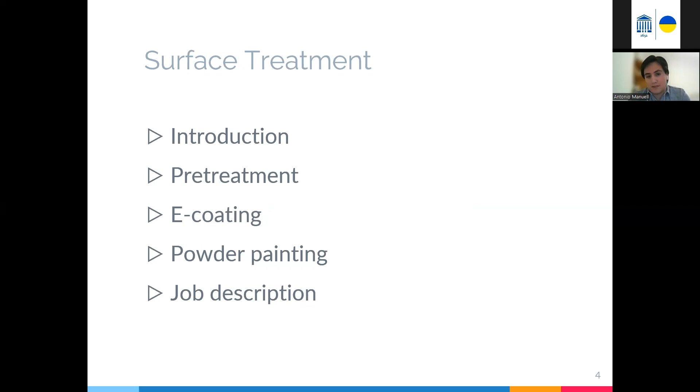So to start with, as I mentioned, surface treatment is when we're preparing a surface, in this case metal of any type. In our company we deal mainly with hot rolled and cold rolled steel, but it can be zinc, copper, or whatever metallic surface. There will be different technologies suitable for different metals, from the most tiny nut or bolt up to a fancy car, or all the signs that we see on the streets or highways.

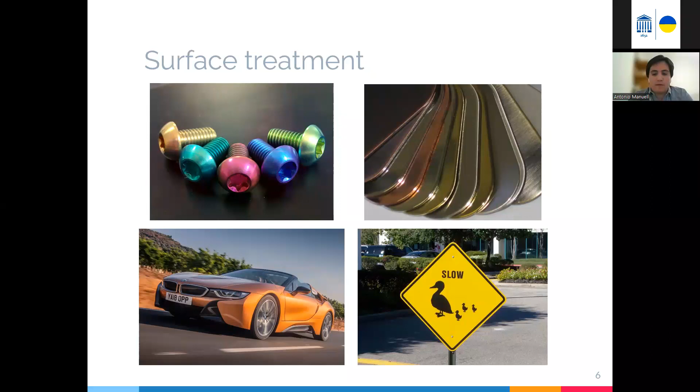Pretty much every single metal you can find around your house or around you has gone through some sort of surface treatment. There are so many different technologies applied for this—electroplating, anodizing, phosphating, etching. There's almost an endless list of different systems, or different technologies, that you can apply in combination depending on your target and the quality you're achieving. It's just like choosing the right tool for the right job.

It's not that we want to overdo the quality for something that doesn't really require that much protection, and at the same time we don't want to get into the short end, just making a little bit of surface treatment where something actually requires a lot more protection.

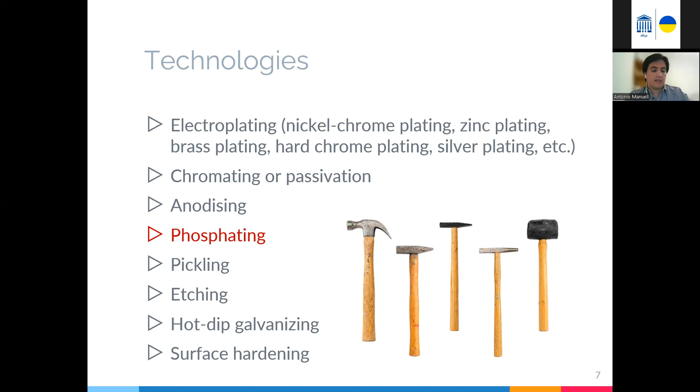We're going to be focusing a little bit more on phosphating, which is the surface treatment that I take care of—the technology I'm most familiar with. All of this is basically to stop corrosion. Actually, we cannot stop corrosion; the only thing we can do is delay it as much as possible. That's why we utilize different types of processes, depending on how long we can or want to delay this corrosion.

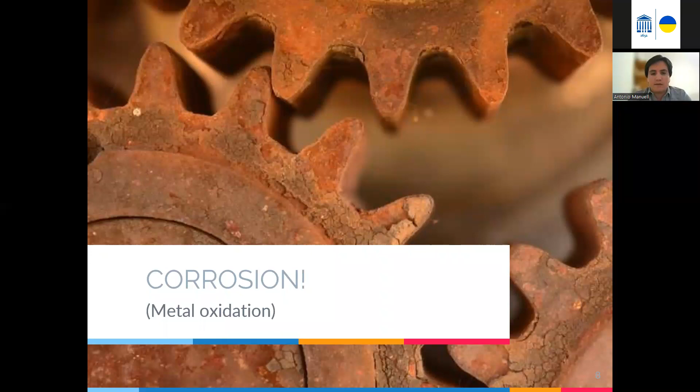As I said, it's impossible to stop corrosion, but what we want is to delay it. So the applications will be for all metal surfaces that we're going to surface treat—we just want them to last as long as possible, and for achieving that, we need to delay the corrosion.

This actually also has another aesthetic application, depending on the top coat or the technology and requirements you need, and it's mainly for outdoor exposure. Since I work in the automotive industry, cars go all over the world, in all types of environments with a lot of humidity, heat, cold, snow, and salt on the streets. So the surface treatment composition or system we choose must be able to protect against all of that range of temperatures and environments.

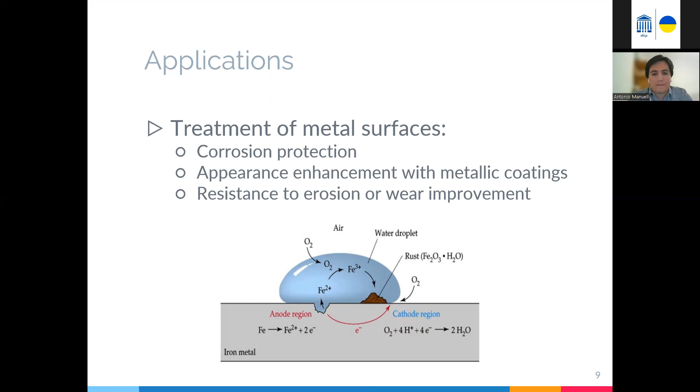Our process flow basically starts with a pretreatment, where the main core or the most functional part will be the phosphating. We will get into that one. Then we will have the electrocoating, which is just a cathodic process. And then the powder painting.

This is what I meant by you need to choose the right system of surface treatment for the right job. For something that doesn't require that much quality or protection, you might get away with only choosing the first two, pre-treatment and e-coating, and skip the powder coating. Or if you don't need that tough of a protection but still need a top coat, you maybe skip the e-coating and do pre-treatment and powder painting, depending on the product, or depending on the environment where that product is going to be utilized.

If it's going to be indoors, let's say, for example, hospital beds. Hospital beds are not really outside at minus 20 degrees with snow, but they also require some protection because hospitals are very often sanitized, so there's moisture involved also, so they need some protection. Just to give another example.

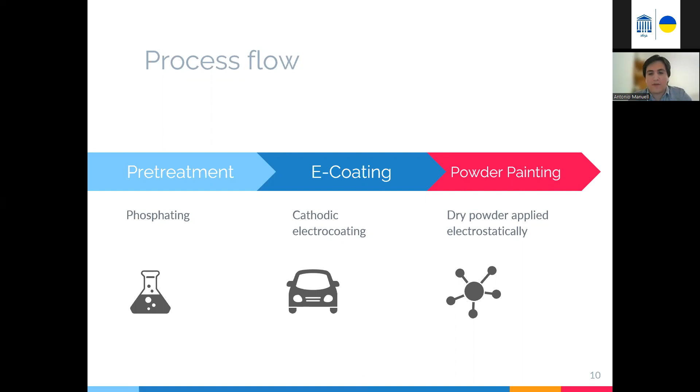So to start with the pretreatment, it's going to be composed of different stages. We're going to have first our degreasing stages, which in our case are two different stages that together make the cleaning stations. Some rinses, then what is called a conditioner, then the zinc phosphating bath, more rinses, then what's called the seal rinse or passivation stage, and then a demineralized water rinse.

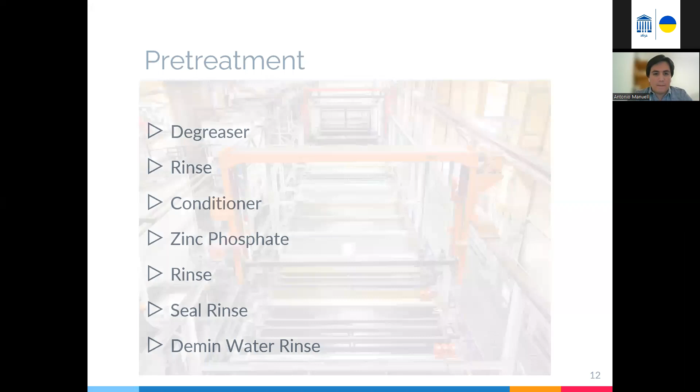This is how it looks. There's different ways of laying out this process, but in our case it's basically 15 different tanks with transporters that just move the articles or the products from one stage to the next, and each stage has its own different parameters and purposes, all combining to make this surface treatment system that we're looking for.

Starting then, first things first, with the degreaser. We received the metallic components. Actually, the metallic components are also manufactured here in Estonia, just in a plant in Pärnu for the most part.

The degreaser's purpose, what it's going to do, is just to remove any oil, grease, dust or particles that are on our products that we want to protect. It can be just from being outside in the environment, or because of the manufacturing process, where very heavy oil greases are used as lubricants for deep forming processes, or it can be from welding. There's a whole lot of different impurities that we consider impurities for our process that can mess up our surface treatment.

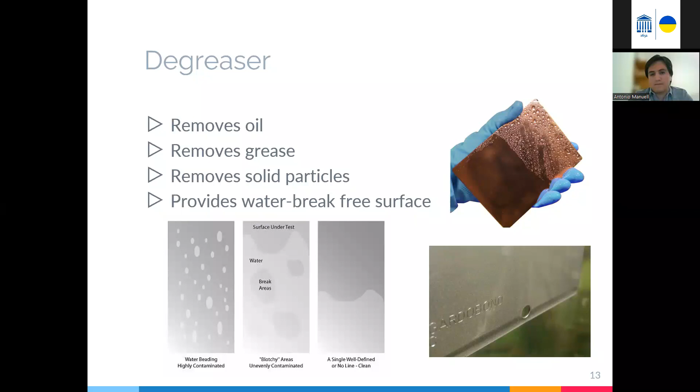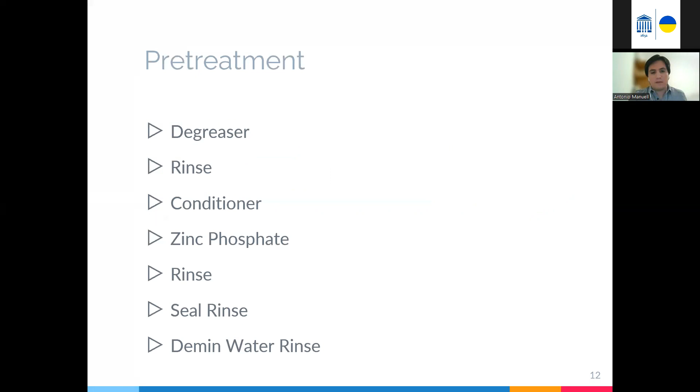Then we got three rinses. These are mainly just to remove the excess of the degreaser solution, because we don't want any of the solutions or different components of each bath to travel down the road to other baths. Some of them actually make some very nasty reactions that will maybe block your filtration pumps or your circulation pumps or your filters, which is something you really want to avoid.

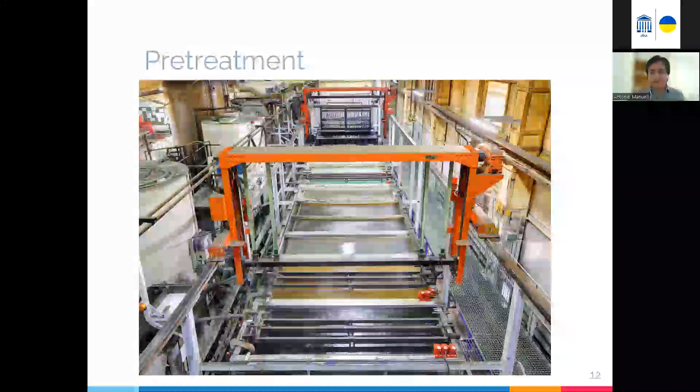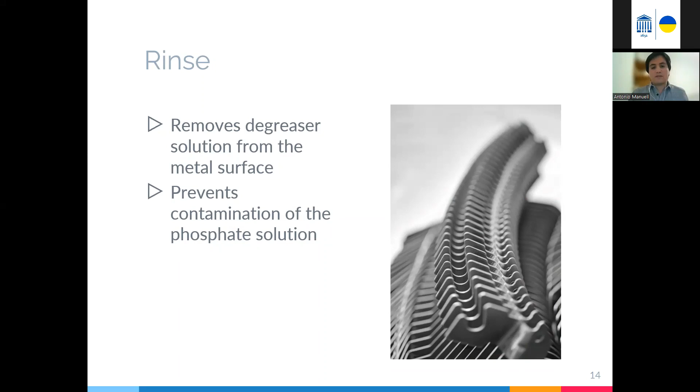So that's the whole point of the rinses, to create these buffer zones that remove anything that doesn't belong down the road in the process line. It also removes the chemicals or solution left over on the parts, because not all parts are very simple. Some of them have a lot of different shapes or tubes or places where that solution can actually collect, and then you have what we call drag out of the solution. So we want to minimize that as much as possible, push it back to the stages where it belongs. In this particular rinse, what we don't want is to contaminate the phosphate solution that comes two stages later.

Then we have the conditioner, or what we call the activation. This one works very closely together with the zinc phosphate stage, because what it's going to do is activate the surface.

How it will activate is basically because once we have our clean metal surface, after the degreasing stages and the rinses, it's going to deposit some salts where the zinc phosphate crystals can start growing. That gives us a very uniform, very smooth crystal structure. If we would skip this and go straight into the phosphate stage, the reaction will still happen. We still have the clean surface layer, but the zinc crystal layer won't grow as uniform, it'll be more accidental. Depending on the corrosion resistance you're looking for, that might already be a failure point or weak point for corrosion to start acting on your product.

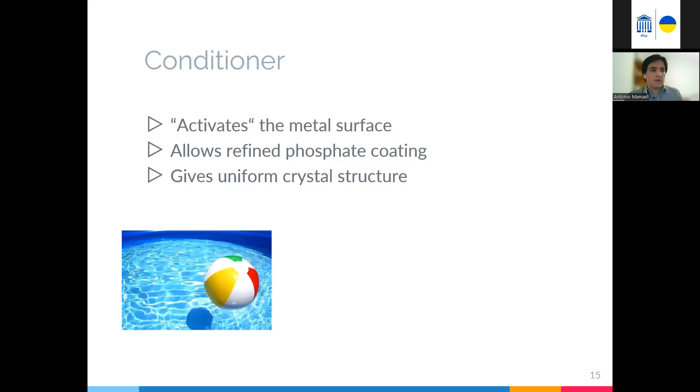So basically, if we imagine our clean metal surface is the surface of a pool, it's easier for us to cover it if we just put some balls on top, and those would be our zinc crystals. What covers the surface better, big balls or slightly smaller balls? If we have really big balls, or in this case crystals, the gaps between them at a microscopic level are still somewhere moisture can penetrate and attack our surface. The whole point is to isolate it to delay corrosion. So the smaller the crystals, the smaller the gaps between them, because they cover the surface better, as close as possible to 100% protection coverage so corrosion can't penetrate. If we go even smaller in crystal size, we get an almost foolproof layer where all the little gaps are covered as much as this technology allows.

So for achieving that, there are several parameters in these couple of stages, the conditioner activation and the phosphating bath, that will play a role in determining which type of crystals we're going to end up with.

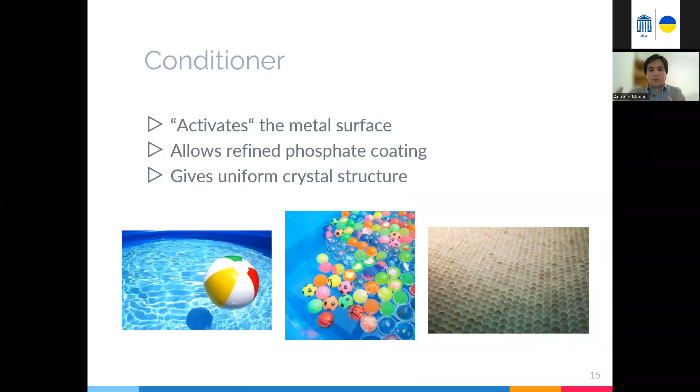So the zinc phosphate layer, as I hinted in the beginning, is the core stage for our corrosion protection. What it's going to do is just delay corrosion. This isn't really considered a painting coating, different from wet paints or later the e-coat, because we're just adding an extra layer that isolates our material, but it's not applied to the surface, it's actually chemically modifying the surface. So after this layer, what we'll have exposed on the surface is the zinc layer, no longer the iron or the steel.

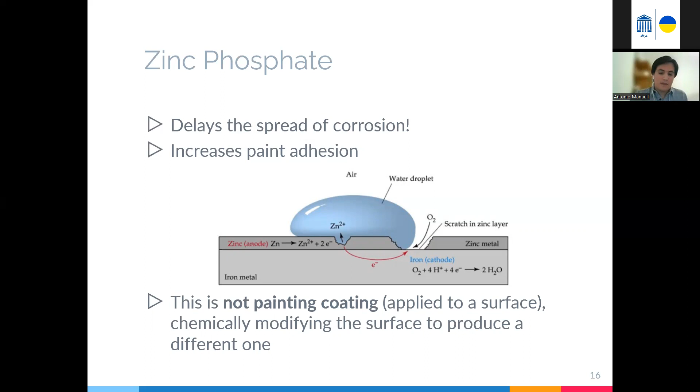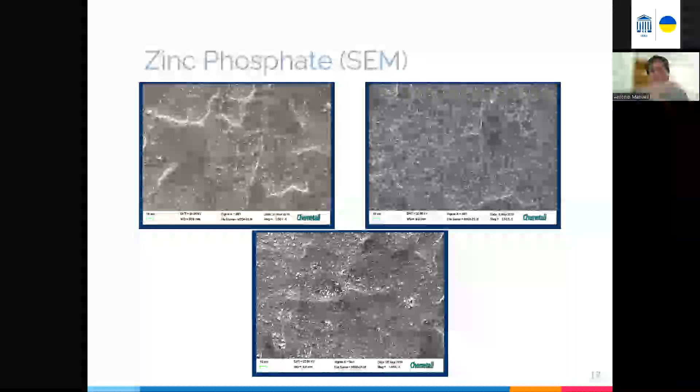After that, we have another rinse stage. This green one here is the phosphate stage. After, we have a couple of rinses, with a very similar function as the previous rinses. What we don't want is the phosphate solution to travel down the road into the e-coat bath or other stages down the road. We want to prevent that from contaminating other tanks.

Also, it removes the extra byproduct, because it's a chemical process. What happens inside of that bath is some byproduct, which is sludge, basically iron phosphate that is generated because of this zinc layer forming on the metal. We want to remove that sludge too, because otherwise it will interfere with the next layer on the system.

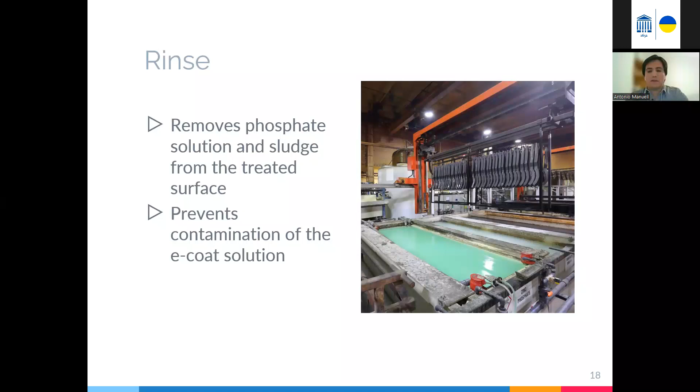Then we have a seal rinse or passivation, which is basically after we've already cleaned our surface and activated it, we put these initiation points where the crystals will start spreading around. Still, even if the crystals are perfectly, ideally, how we want them, on a microscopic level there's still some gaps between them.

So the seal rinse is going to stop the chemical reaction happening, because there's still going to be some droplets of our zinc phosphate solution inside. And you might guess, but if the zinc phosphate solution creates this layer, why not leave it there

I don't know, 5 or 10 minutes? The problem is, once our surface is covered and there's no more iron or steel for the zinc phosphate solution to work on, it's going to start reacting on its own on the same zinc phosphate layer. That won't really destroy it, but when you've achieved this nice uniform layer to protect against corrosion, you'll start having some unevenness, some valleys or hills that you don't want there.

So that's the point of the passivation or seal rinse: to stop this process from continuing by neutralizing and stopping that reaction that's still happening at a microscopic level, with the droplets trapped between the crystals.

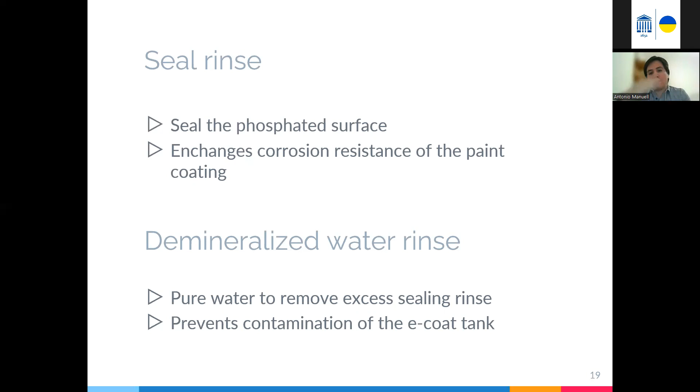After that, we have our last stage of the pre-treatment part. All of this, since the degreaser, is considered pre-treatment line. So the demineralized water rinse is just our last chance to remove any dust that could have been deposited on the part during transportation between stages, and it acts as a safety belt for our e-coat tank, which is the next stage.

So it's all good and dandy that I'm telling you about all these stages and how our process actually works, but the important part, where applied measurement sciences has a role, is that there are a lot of parameters that need to be controlled in every stage. Not all stages are controlled with the same parameters.

Zinc phosphate, for example, has much more parameters that need to be controlled and adjusted than, say, the rinsing stages. For the rinsing stages, you just want them not to have high concentration, and basically to have a fresh intake of water to have a functional rinsing stage.

But then all parameters can vary, from total and free acid or alkalinity, temperatures of the baths, pH, conductivities, how long you have the articles in that stage, meaning the process time, and the circulation of the bath.

So let's put a quick example: if our cleaning stage is at a very good, ideal concentration, the temperature is right, everything's fine, articles go in, but there's no fresh solution basically cleaning the parts because we don't have any circulation, or the percentage of solids, or how contaminated our part is - if the degreaser is meant to remove oil, the oil concentration will start rising in the bath if we don't do anything about it.

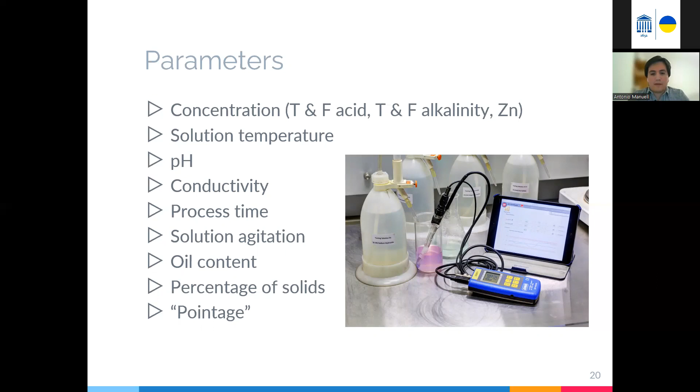So that's the whole point: to exemplify that all these stages, so far 11 stages, all have to be controlled and monitored for different critical parameters on each.

And for that, as I mentioned, zinc phosphate is one of the most convoluted. There's something called a design of experiment that will allow you to identify which parameters are your critical ones, because once you start having quality issues, it's very difficult to pinpoint whether it's because the temperature at this stage was, say, 5 degrees hotter or colder.

So a design of experiment allows us to take all the different parameters from the zinc phosphate solution, for example, agitation, free acidity, accelerator, pointage - there's no point in describing all of them, but just to know there are many different parameters to control in that stage. What the design of experiment gives us information on is which of these parameters have the biggest impact. Maybe temperature doesn't play that big of a role, or maybe the combination of two different parameters plays a big role.

For example, if we increase the total acid and we increase the temperature, we will have the best type of - it's not the case, but just for an example - the perfect type of crystals. Or if we pull parameters here and there, which combination of parameters gives us the best result. That's something very time consuming, especially for the design of experiment in a process line like this, because you need to adjust all the parameters where you want them, and then just play with one parameter, like total acidity, and see if that actually had an effect on your crystal layer. You start cross-linking all these different scenarios.

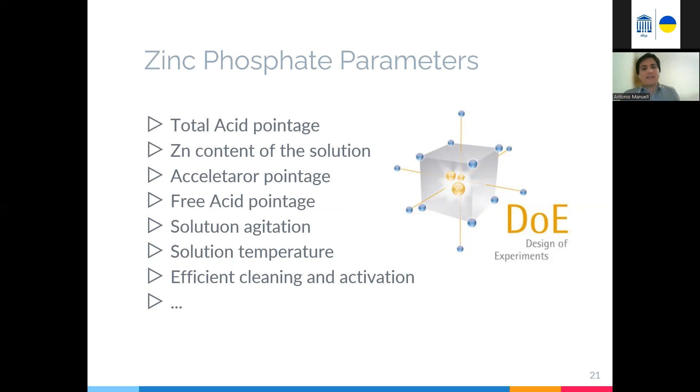So after all the pretreatment, whenever we're done with it, we move on to the electrocoating. The electrocoating basically - what makes it the 'E' part - is that it requires some electricity into it. The paint particles are given an electrical charge. We know positive, negative, opposites attract. We charge the articles with a different charge, and then the paint is going to basically deposit onto our parts, very, very diluted down.

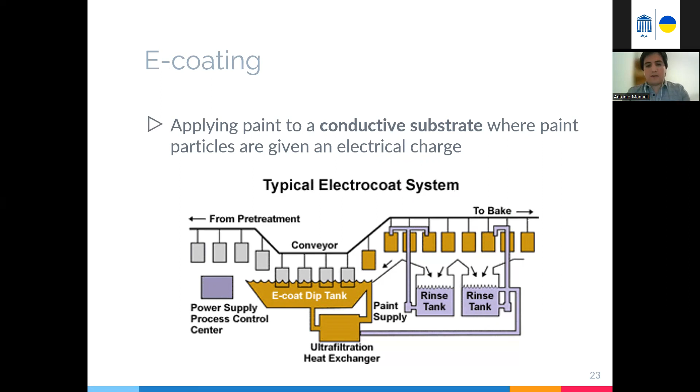There are two types: anodic electropainting or cathodic electropainting. We use cathodic electropainting, basically because of how the technologies have evolved. They started with anodic, but very quickly discovered that cathodic was the way to go because it has better corrosion performance.

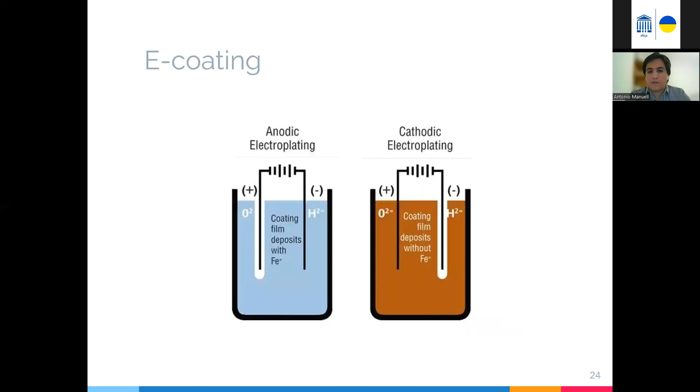So the advantages of electrocoating are basically that it gives us almost full coverage, even for a very complicated part, because it's a dipping process. We're submerging the parts, so all around it is exposed to the liquid, to the paint. It has very good corrosion protection. It's a very economic and efficient process in the sense that everything we feed into the system - like 99% of it - will leave actually on the parts as a film, as a layer.

We don't want anything to be waste or a byproduct, like in the zinc phosphate tank where we have some sludge left over. Here in the E-coat bath, 99% of the chemicals or products that you use are going to leave on your articles. And it has a relatively low volatile organic compounds impact.

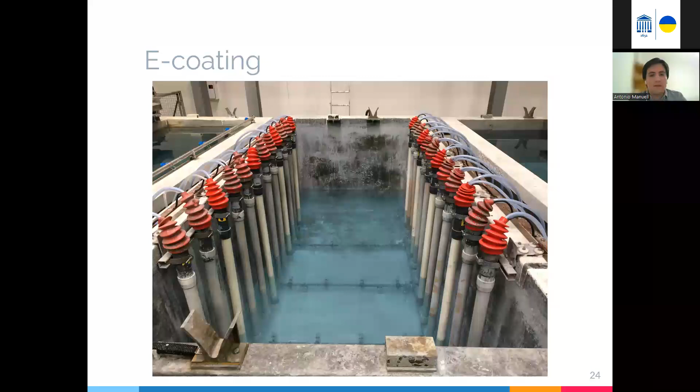Also, because of how the bath looks, you might think we can paint different colors, but it's very tricky to change the colors, and it's almost impossible. Well, not impossible, but very impractical and very costly. So most likely, if you want a specific color for aesthetic reasons or whatever, you will have to build another line that paints that color. It's not that this week we can paint black articles - that's just not how it works.

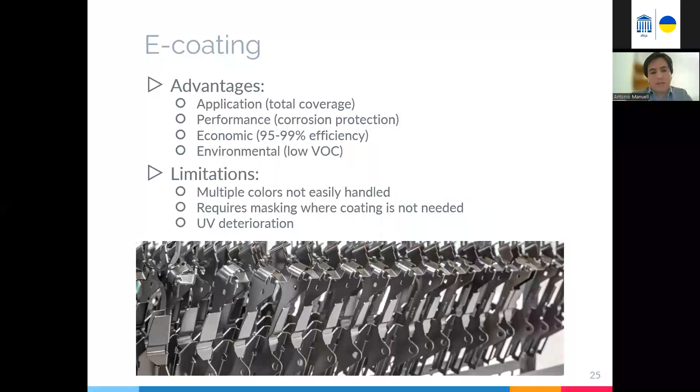This is actually from our production line, and the next week we switch to pink or yellow or whatever. So in the e-coat tank, it also has its parameters that we control.

Here, for example, the gravimetric analysis we use for checking the solids content, because even though it's like the paint tank, as we call it, still 85% of it is only demineralized water. The rest, the 15%, is actually the resin and the pigment combined that makes the paint particles that will be attaching on our parts.

So again, just another example of different things that we have to control now in another stage already in the e-coat bath, not in the pre-treatment.

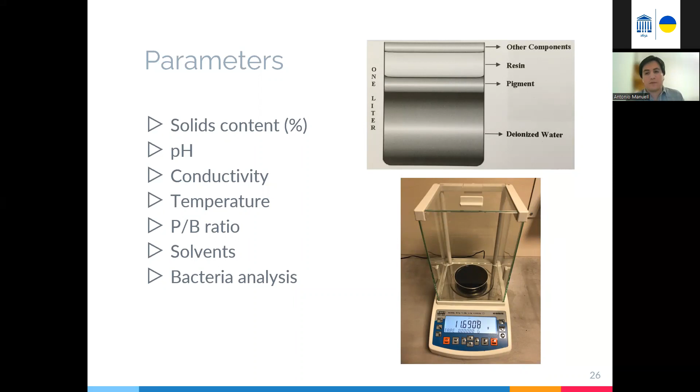And to top it all off, to end, we have powder painting. The powder painting is just a free flow dry powder that is going to be applied electrostatically.

Here we don't have any chemical processes really, it's more physical processes. You just have to make sure that your conveyor line is grounded, so that you have the actual process happening there, and not the powder just falling off the parts. Basically what it's gonna provide is a really good, hard, strong finish on top of the parts.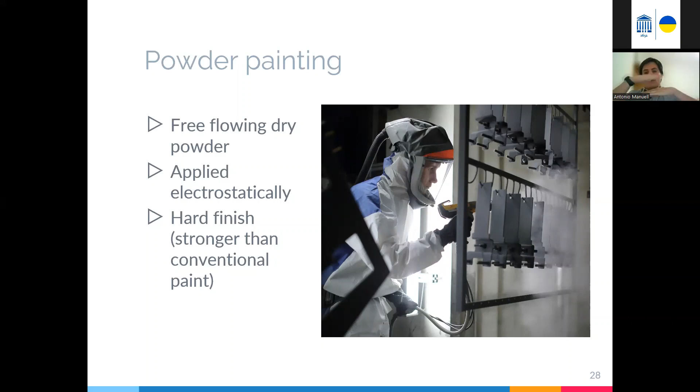And it will cover the biggest drawback of the e-coat, that is the UV exposition. This one is resistant to UV. We have it on top of the e-coat, so we have both layers, and our corrosion protection system works as a compound, as a system.

The advantages I mentioned already a few. This one you can choose different colors, much more easier to just choose the color. 30 minutes, you change your whole system, you clean, and you can apply it on top of the e-coat. Not only the e-coat, but the zinc phosphate is a really good primer for the e-coat, and the e-coat is a really good primer for the powder.

But this is again only our example. It's not the only surface treatment solution that exists.

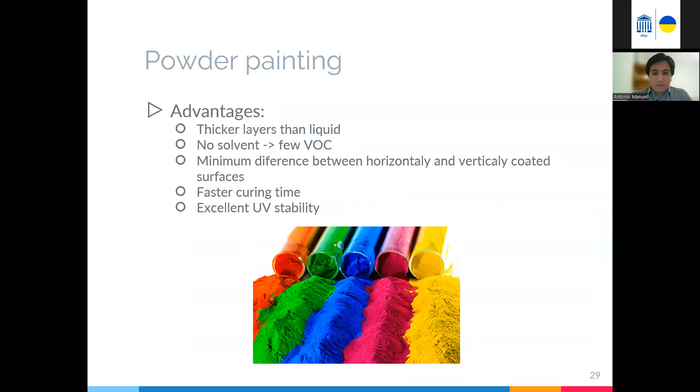So a little bit about basically the job description of being a laboratory manager. There's very many different things that you have to take into consideration. Not everything is just routine, to check the baths and keep all the parameters in control.

The first one is process control, to make sure that all of our parameters are in line, so that we know that the production line is good to go, and is gonna have output of the good quality that we're targeting, depending on our customers' requirements.

Then another part of it is process verification. That means making inter-laboratory analysis, which we don't do every day, but on a monthly basis we take a sample, let's say of the phosphating bath or of the e-coat bath, and then we measure in our laboratory the different parameters, and the sample we split into two.

One we measure inside, and one we send to our suppliers of that chemistry, and then we compare the results to make sure that the same result we're getting of the concentration or pH or whatever is actually correct, as we have another laboratory giving similar or as close as possible results, to make sure that we're on the right track.

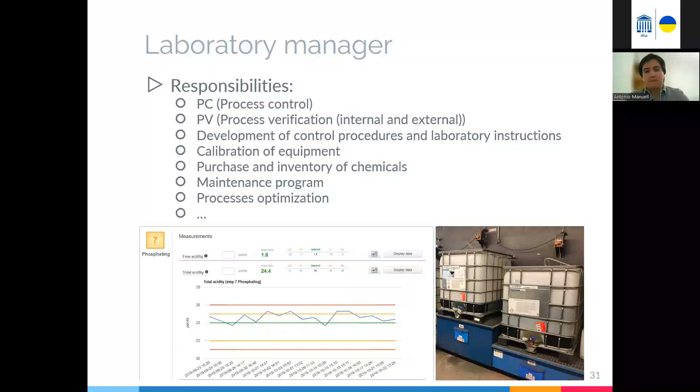Let's say, for example, total acidity of 24 - that's our set point. We don't want a window from 0 to 50, there's no point in that. But if our limit is too narrow, like 23 to 25, that might be too tight, because the production process itself moves that value. So it's about finding the right fit for every parameter, to make sure we're achieving the right parameters for the quality we want.

So with that said, that's as much as I can share with you. And I would like to see if you have any questions.